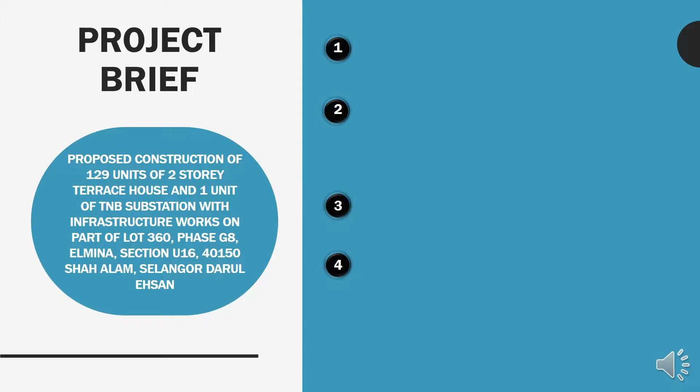The project that we chose is the proposed construction of 129 units of two-story terrace house and 1 unit of TNB substation with infrastructure works at Shah Alam. This project is listed as Platinum Green Building Index. The client of this project is Sime Darby. Meanwhile, the contractor of this project is Sri Mansang Sdn Bhd.

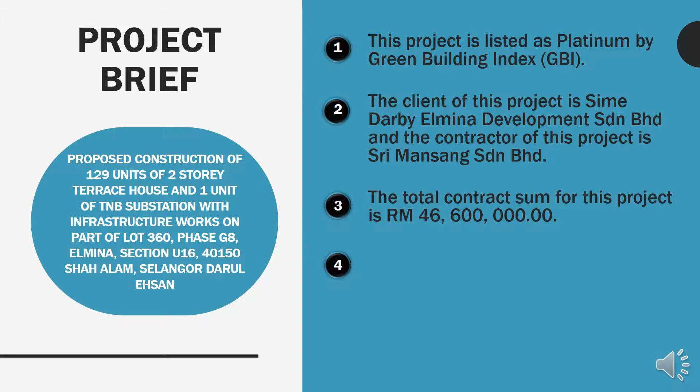The total contract sum for this project is 46.6 million. The completion period of this project is 78 weeks and the date of possession of site is 23rd January 2014 and the date of completion of work is 23rd July 2015.

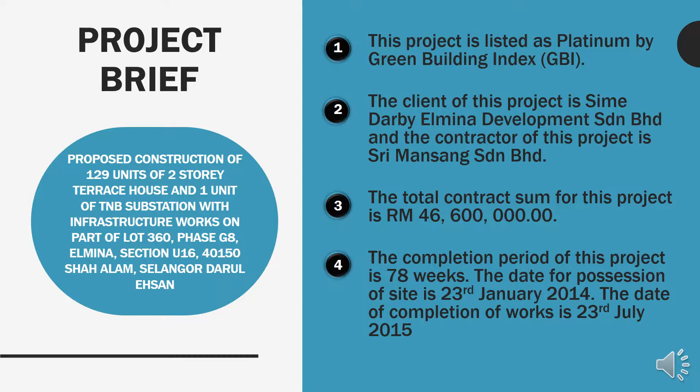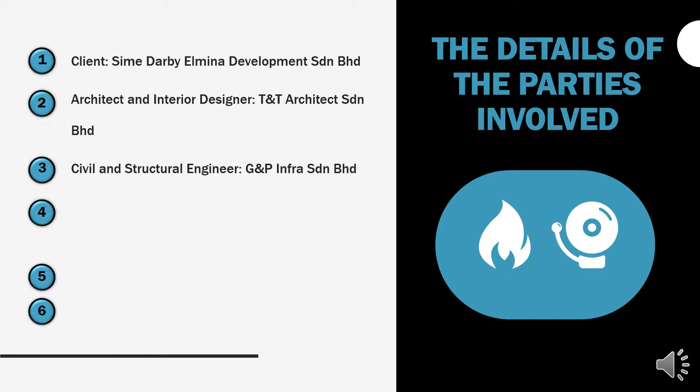The detail of the parties involved: client Sime Darby Elmina Development Sdn Bhd, architect and interior design T&T Architect Sdn Bhd, civil and structural engineering G&P Infra Sdn Bhd, mechanical and electrical engineer Jurutera Perunding Kuasa Tenaga Sdn Bhd, landscape design Mentari Design and quantity surveyor Basar and Harun Sdn Bhd.

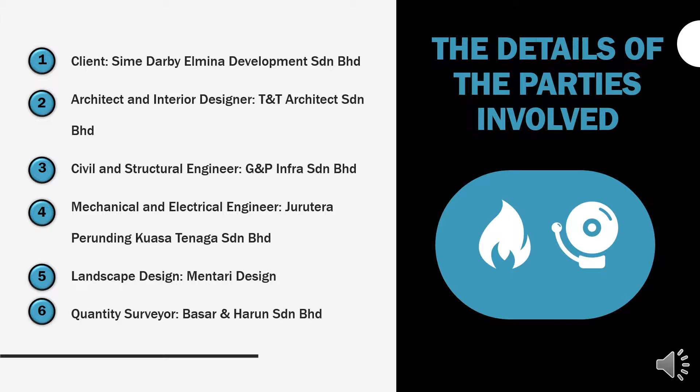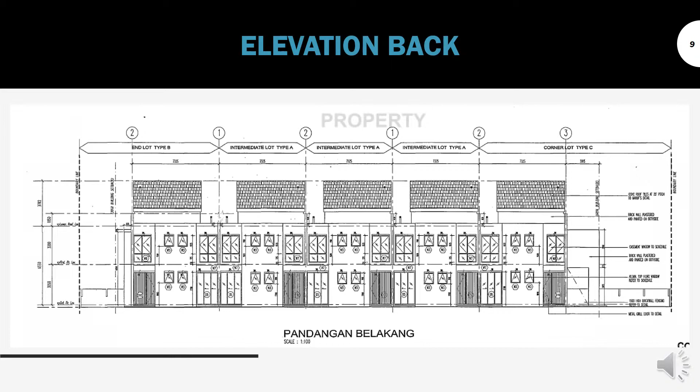The influence of building morphology. This project is rectangle shape, and this shape has been selected to maximize the usage of land and to provide adequate space and, the most significant thing, lighting. This house is divided into three types which are corner lot, intermediate and end lot.

The size of corner lot is 10.14 meters length, the size of intermediate lot is 7.33 meters length and the size of end lot is 11.8 meters length. The story height of the house is 9.73 meters and the total height of the house is 19.46 meters.

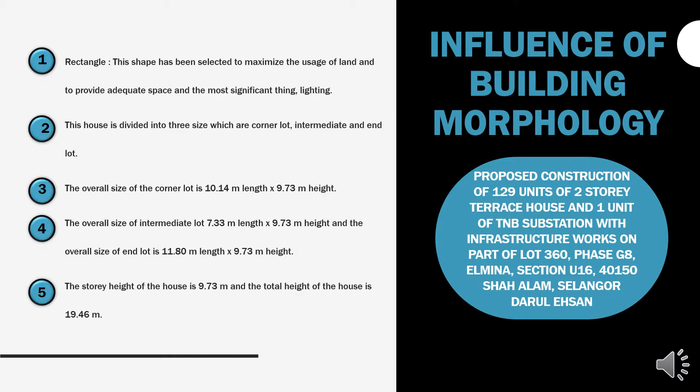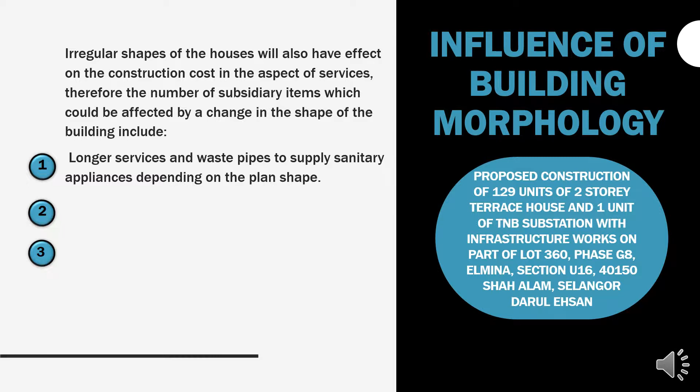Irregularity of the house will also have effect on the construction cost in the aspect of services. Therefore, the number of subsidiary items which could be affected by a change in the shape of the building include longer service and waste pipes to supply sanitary appliances depending on the plan shape, possibility of high roof cost due to increased number of corners which cause material wastage, and possibility of additional costs in applying finishing and decoration.

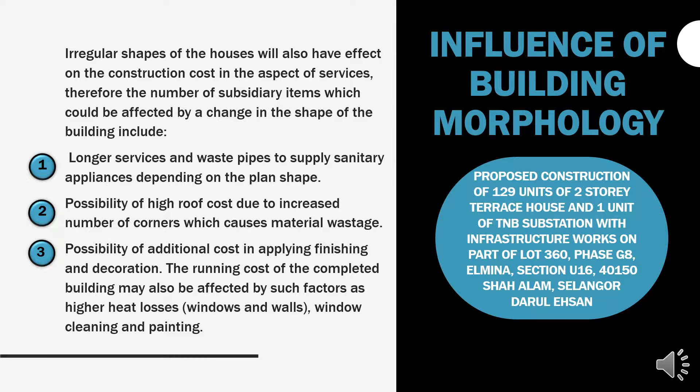The running cost of the completed building may also be affected by such factors as higher heat losses through window and wall, window cleaning and painting. Likewise, for the project that we have studied, the construction costs for the services are not as high as compared to an irregular shape of house.

GFA of corner lot, intermediate and end lot is 98 meters square, 71 meters square and 114 meters square respectively. We have studied a number of other buildings with different shape and height with the same GFA as the intermediate house, which is 98 meters square. We have come to a conclusion.

The total construction cost increases with increase in the perimeter wall length in relation to the floor area. The increased cost becomes well pronounced when the height of the building is increased with additional floors without altering the total floor area. Irregular shape will reduce the usable area, and simple design is more economical than irregular design.

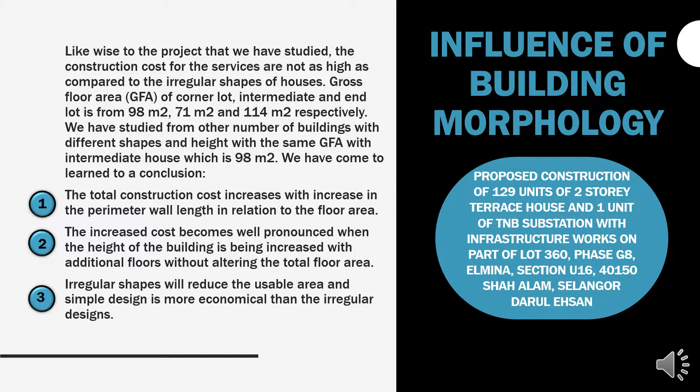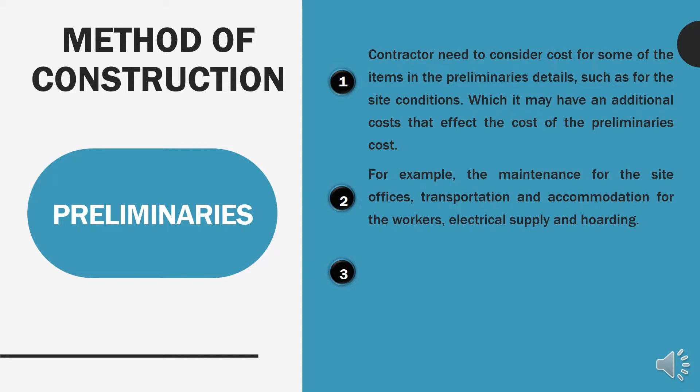Method of construction. Preliminaries. Contractor needs to consider cost for some of the items in preliminary detail, such as the site condition, which may have additional costs that affect the preliminary costs. For example, the maintenance for the site office, transportation and accommodation for the workers, electrical supply and hoarding. For the project that we use in our task, the preliminary cost is 1.8 million ringgit Malaysia.

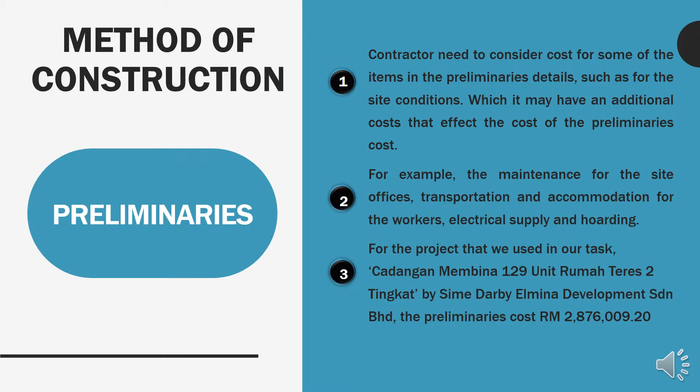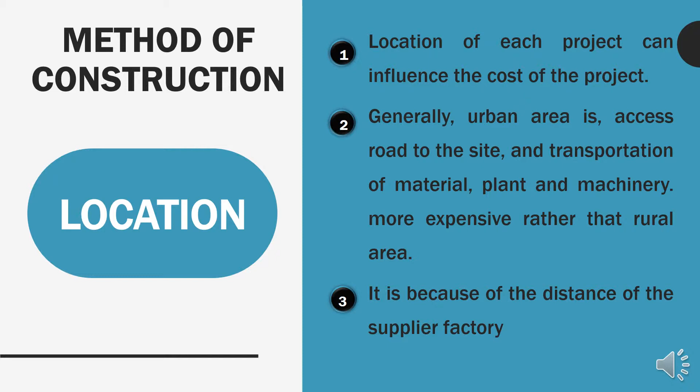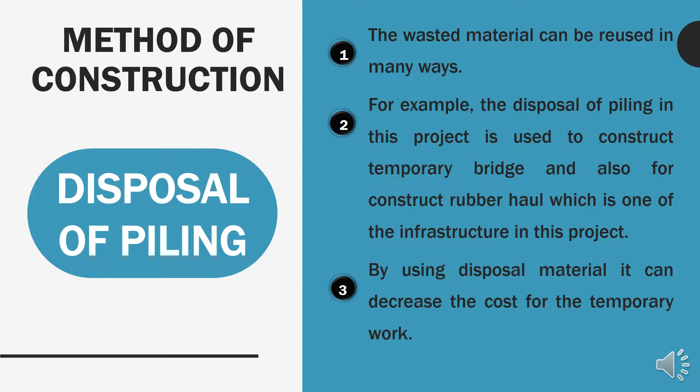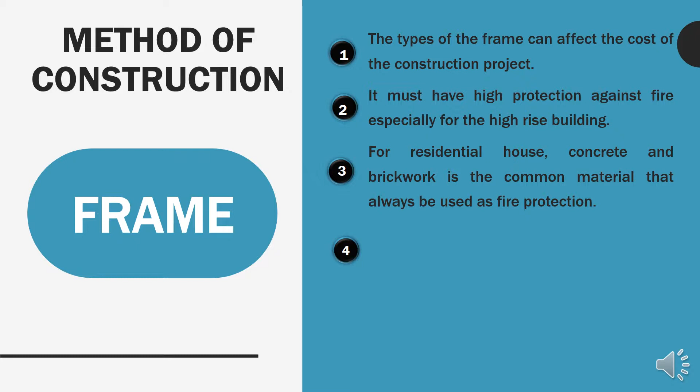Frame. The type of the frame can affect the cost of the construction project. It must have high protection against fire, especially for high-rise buildings. For residential houses, concrete and brickwork are the common materials always used as fire protection. For this project, Elmina used reinforced in situ concrete for the frame and natural sources of aggregate. Most of Elmina's projects use these two types of material.

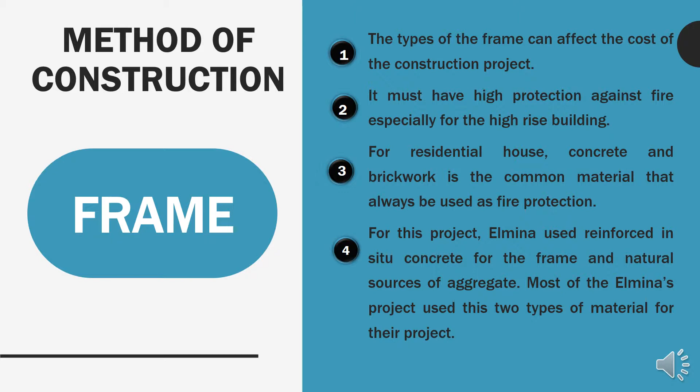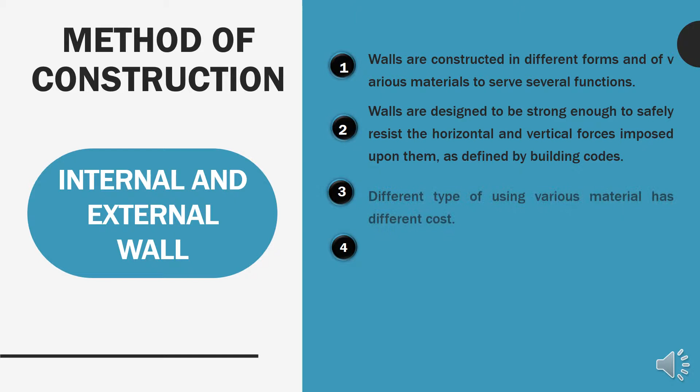Internal and external wall. Walls are constructed in different forms and various materials to serve several functions. Walls are designed to be strong enough to safely resist the horizontal and vertical forces imposed upon them as defined by building codes. Different types using various materials have different costs. For the Elmina project, 220 mm thick cement and sand brick is used for the external wall and 110 mm thick cement and sand for the internal wall.

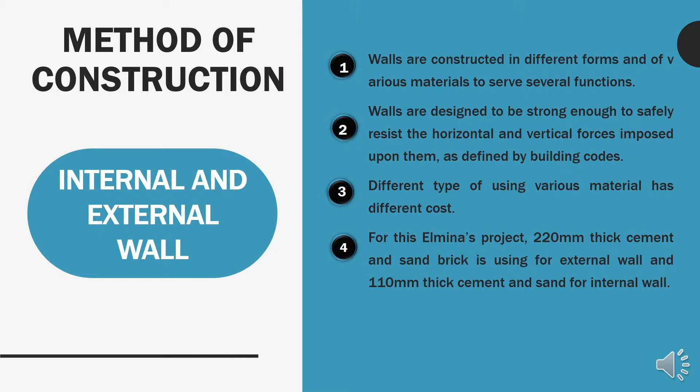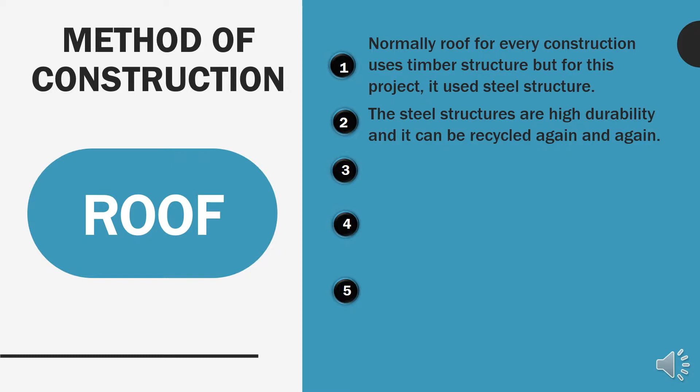Roof. Normally, the roof for every construction uses a timber structure. This project uses a steel structure. Steel structures have high durability and can be recycled again and again. For the roof covering, this project uses Colorbond galvanized iron sheet. They are light in weight, inexpensive, provide insulation for the structure and save energy. So both materials are the best choice for green recycled roofing materials.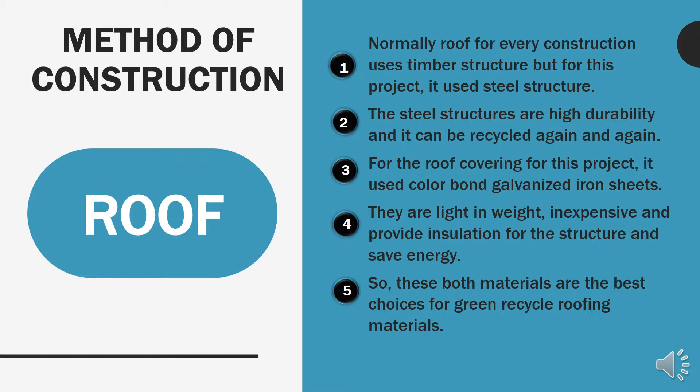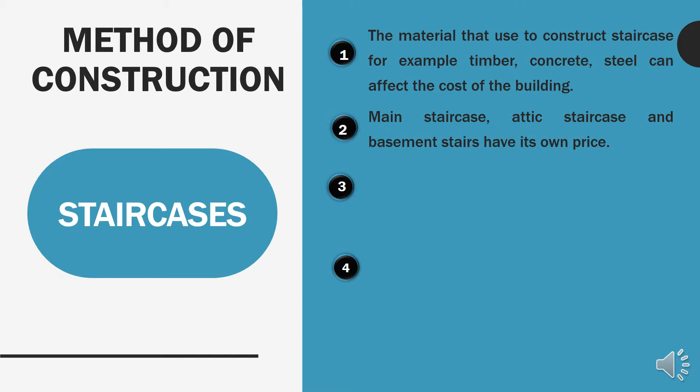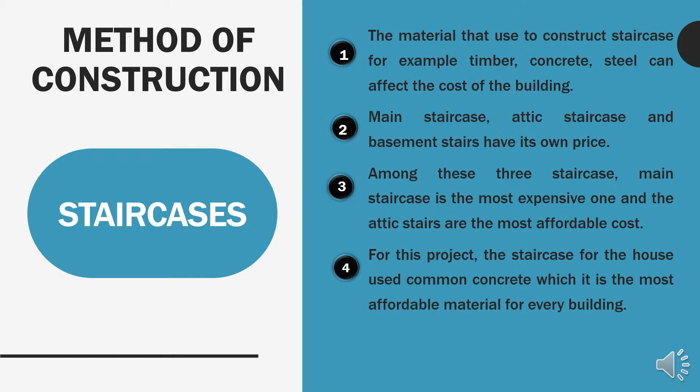Staircase. The material used to construct the staircase, for example timber, concrete, or steel, can affect the cost of the building. Main staircase, attic staircase, and basement stairs each have their own price. Among these three staircases, the main staircase is the most expensive one, and the attic staircase is the most affordable. For this project, the staircase for the house uses common concrete, which is the most affordable material for every building.

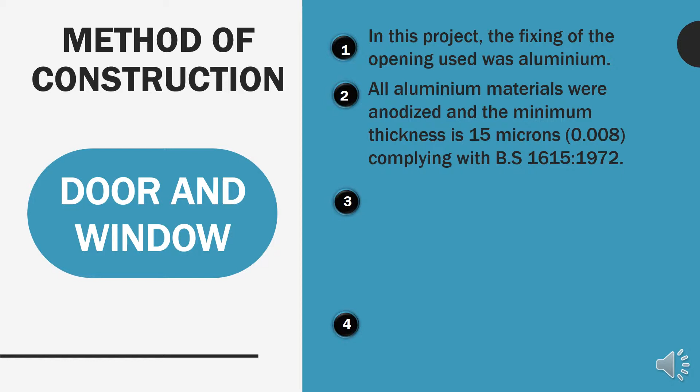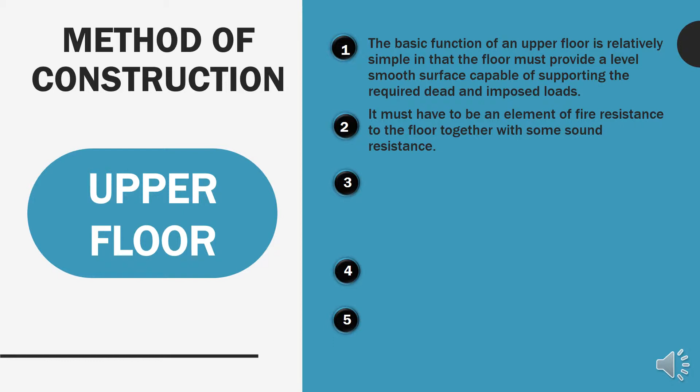Upper floor. The basic function of the upper floor is relatively simple in that the floor must provide a level, smooth surface capable of supporting the required dead and imposed loads. It must be fire resistant together with some sound resistance. The concrete floor slab construction process includes erection of formwork, placement of reinforcement, pouring, compacting, and finishing concrete, and lastly, removal of formwork and curing of the concrete slab.

For this project, it used from 115 mm to 275 mm thick slab, and they use reinforced in situ concrete. Concrete is from natural sources, which are sand and aggregate.

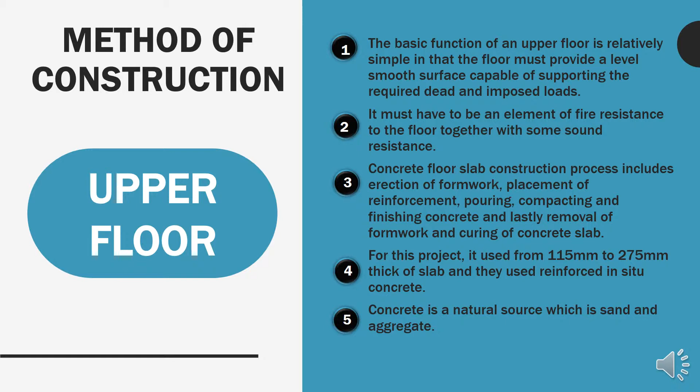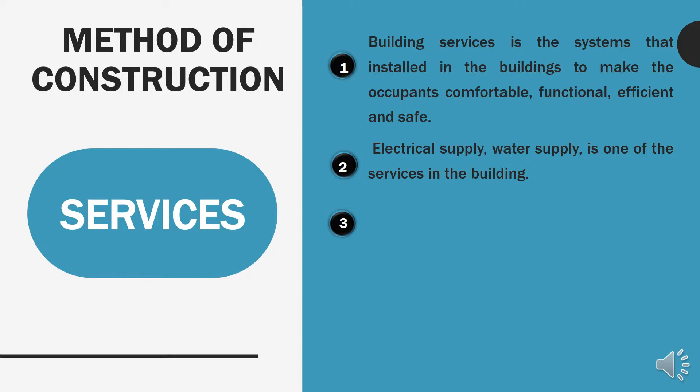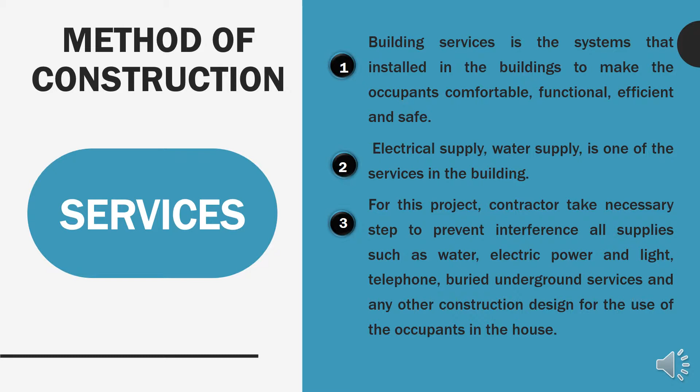Service. Building services are the systems installed in the building to make the occupants comfortable, functional, efficient, and safe. Electrical supply and water supply are among the services in the building. For this project, the contractor takes necessary steps to prevent interference of supplies such as water, electric power and light, telephone, buried underground services, and any other construction designed for the use of occupants in the house.

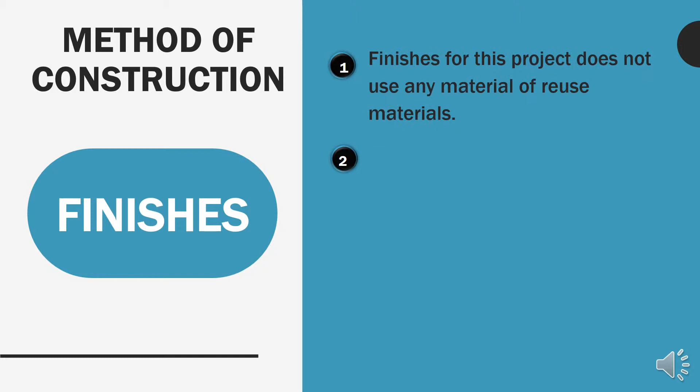Finishes. Finishes for this project do not use any reused material. Generally, finishes for every project, including this project, use ICI Dulux Weathershield acrylic wall finish for external, meanwhile, internal uses ICI Maxilite Plus emulsion.

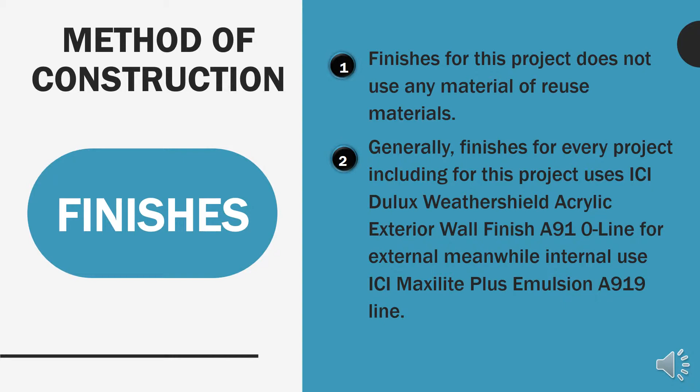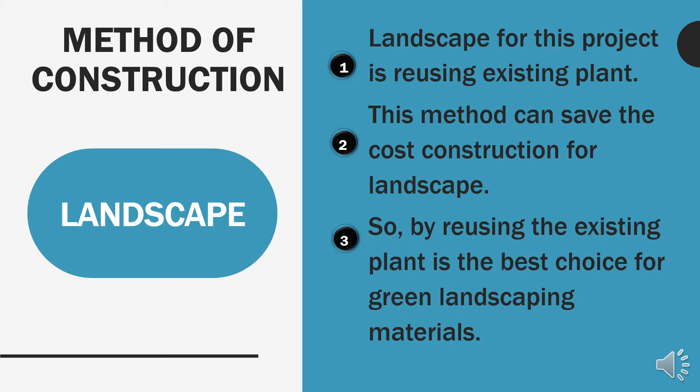Last, for the method of construction, which is landscape. Landscape for this project is reusing existing plants. This method can save the construction cost for landscape. So, reusing the existing plants is the best choice for green landscaping materials.

Green features of the building. A green building is a building whose design, construction, or operation reduces or eliminates negative impacts and can create positive impacts on our climate and natural environment. Green building preserves natural resources and improves our quality of life.

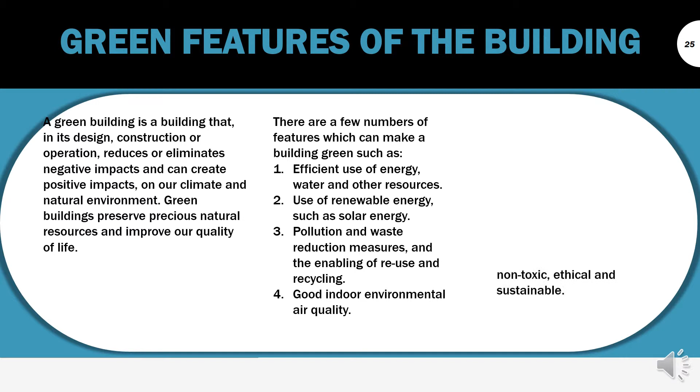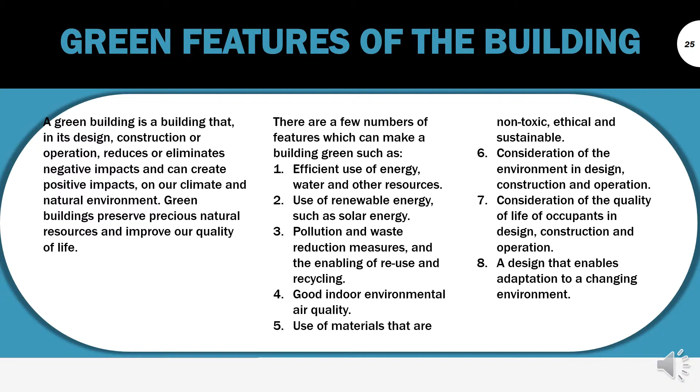There are a number of features which can make a building green, such as efficient use of energy, water, and other resources, use of renewable energy such as solar energy, pollution and waste reduction measures, and the enabling of reuse and recycling, good indoor environmental air quality, use of materials that are non-toxic, ethical, and sustainable, consideration of the environment in design, construction, and operation, consideration of the quality of life of occupants in design, construction, and operation, and a design that enables adaptation to a changing environment.

The landscape for this project is using existing plants to prevent the wastage of plants by using the existing source at the site. The surroundings of the houses are equipped with trees which allow the residents to be healthier. At the same time, it improves outdoor air quality.

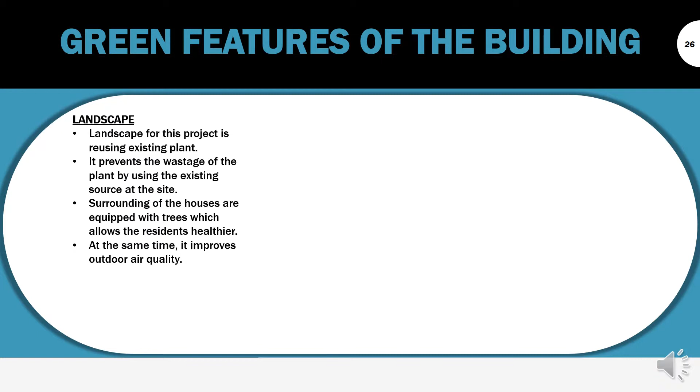Window, the fixings of the openings use aluminum. All aluminum material was anodized. The color was natural anodized, which increases resistance to corrosion and provides better adhesion for paint, primer, and glue than bare metal. It can be recycled. The house allows good openings to receive lighting from the sun. It increases the lighting inside the house. It gives indoor air quality and good ventilation inside the house.

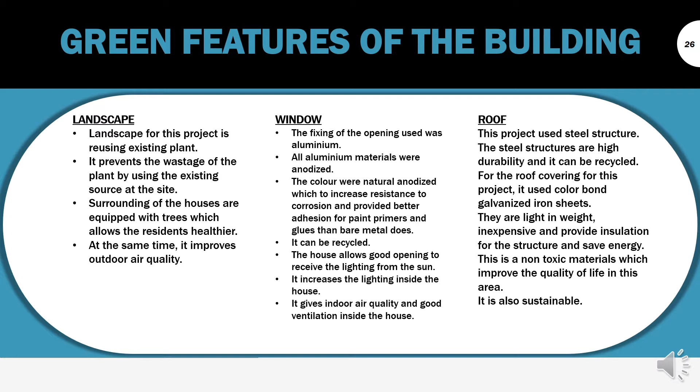For roof, this project uses steel structure. The steel structure has high durability and it can be recycled. For the roof covering, this project used Colorbond galvanized iron sheet. They are light in weight, inexpensive, and provide insulation for the structure and save energy. This is a non-toxic material which improves the quality of life in this area. It is also sustainable.

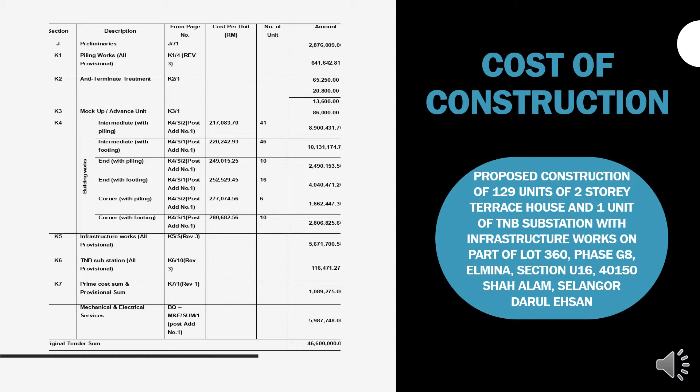This is the cost of construction. The final cost of construction is 46.6 million Malaysian ringgit.

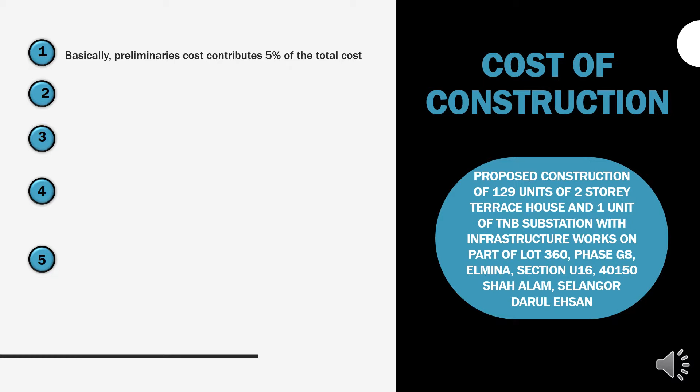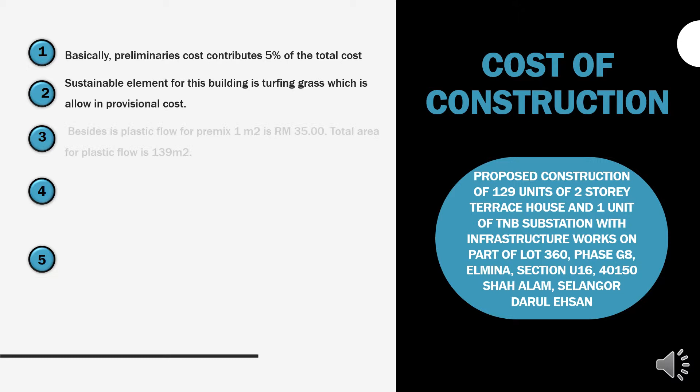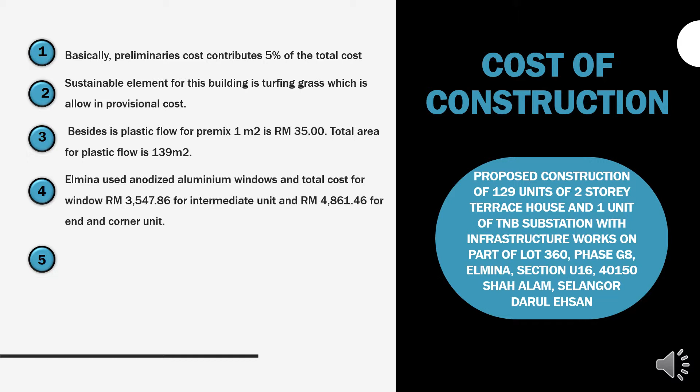Basically, preliminaries costs contribute 5% of the total cost. The sustainable element for this building is the turfing grass, which is allowed in provisional cost. Besides, there is plastic flow; per 1 meter square it is 35 ringgit Malaysia. So the total area for plastic flow is 139 meter square. Elmina uses anodized aluminum windows, and the total cost for windows is 3547 ringgit Malaysia for intermediate.

Meanwhile, 4861 ringgit Malaysia for end and corner. Elmina also uses an excess of piling for a bridge, which acts as temporary access to the site from the public road, and it costs 25,000 ringgit Malaysia.

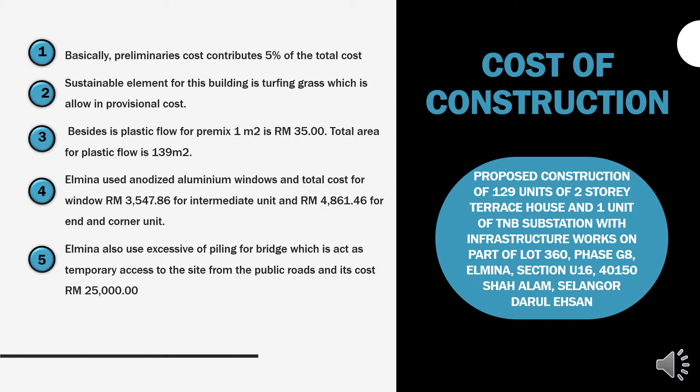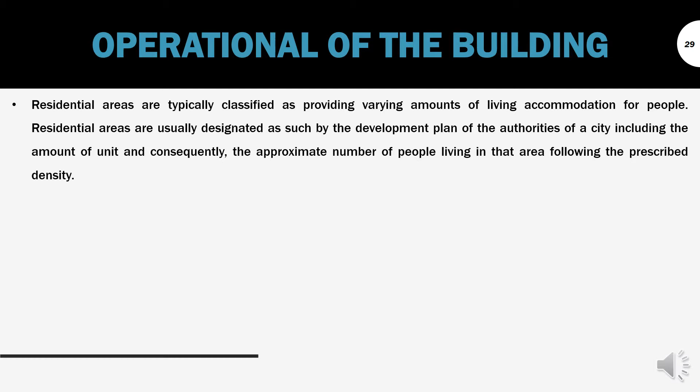Operational of the building. Residential areas are typically classified as providing varying amounts of living accommodation for people. Residential areas are usually designated as such by the development plan of the authority of a city, including the amount of units. Consequently, the approximate number of living in that area follows the prescribed density. A residential building is one that is designed and accordingly built for inhabitants to live in and is called a house. Inhabitants can either be a family, single, a couple, roommates, and even a group.

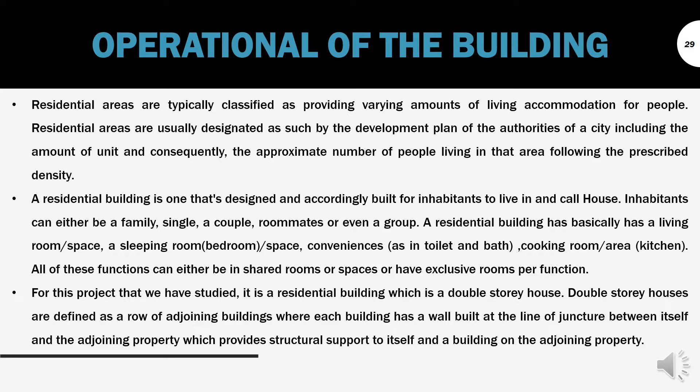A residential building basically has a living room or space, a sleeping room or space, conveniences, which is toilet and bath, and a cooking room or kitchen. All these functions can either be in a shared room or space or have an exclusive room per function. For this project that we are studying, it's a residential building which is a double-story house. Double-story houses are defined as a row of adjoining buildings where each building has a wall built at the line of juncture between itself and the adjoining property, which provides structural support to itself and a building on the adjoining property.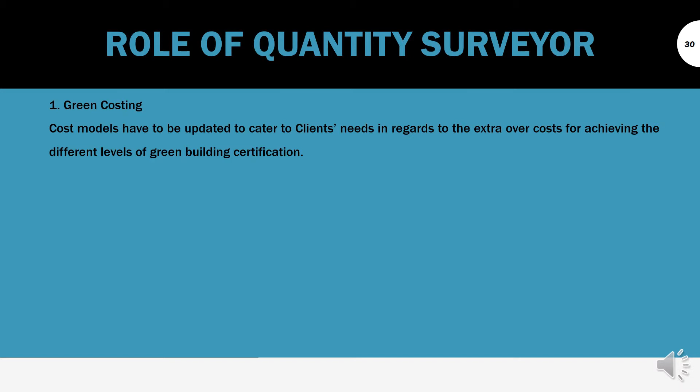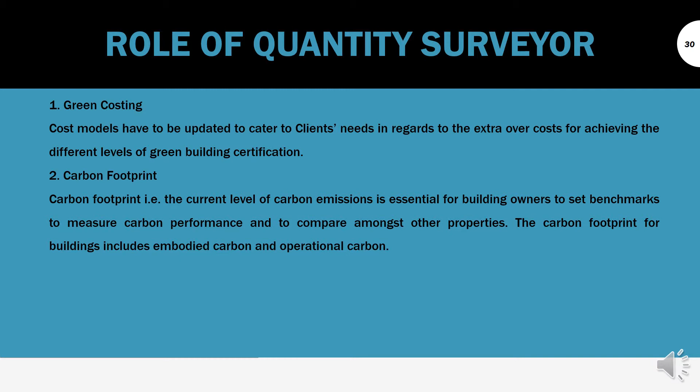The role of the quantity surveyor. First, green costing. The cost model has to be updated to cater to the client's need in regard to the extra over costs for achieving the different levels of green building certification. Second, carbon footprint. The current level of carbon emission is essential for building owners to set a benchmark to measure carbon performance and to compare amongst other properties. The carbon footprint for a building includes embodied carbon and operational carbon.

Third, life cycle costing or life cycle assessment. LCC will grow in importance in the next few years, and the QS, who is an expert in cost management, is in an excellent position to gear itself for this role. LCC can be used to assist the management in the decision-making process to go green.

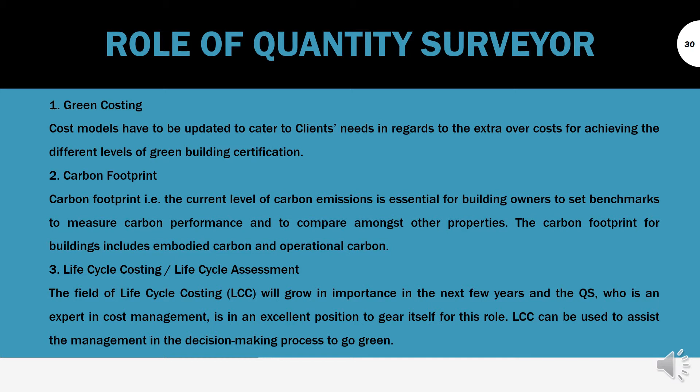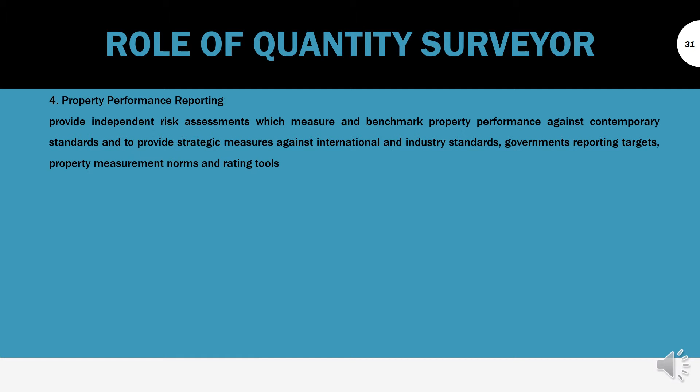Fourth, property performance reporting. Provide independent risk assessment which measures and benchmarks property performance against contemporary standards and provides strategic measures against international and industry standards, government reporting targets, property measurement norms and rating tools.

Fifth, green building rating assessment. Courses such as the LEED accredited professional certification have been created to enhance the understanding of the relevant green building rating system and environmentally sustainable design. With a greater understanding of the green building rating system, the QS will be in a better position to advise the client both on the costing and sustainable design.

Building information model. With the advancement in building information modeling, which is the BIM system, the use of object-oriented CAD may be able to contain information such as green assessment points, intelligent advice on usage, LCA with carbon specification, and real-time costing as well.

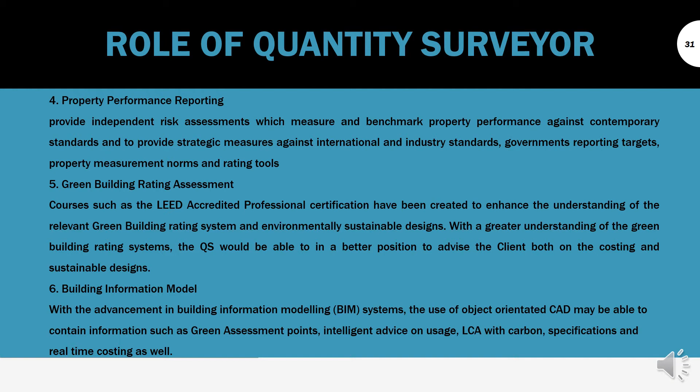The conclusion is sustainable construction is about more than the fabric of the built environment. The effect of the design variables and the method of construction of this green building index probably influence the cost of the building itself. With the exposure of green building or sustainable building in the construction industry today, players in the construction industry will be aware of the benefits given by green or sustainable buildings. The next generation can still experience the nature of today if we properly care about nature.

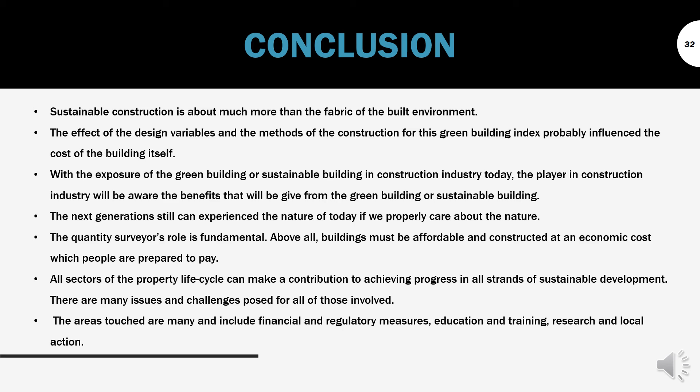The quantity surveyor's role is fundamental. Above all, buildings must be affordable and constructed at an economic cost which people are prepared to pay. All sectors of the property life cycle can make a contribution to achieving progress in all strands of sustainable development. There are many issues and challenges posed for all of those involved. The areas touched are many and include financial and regulatory measures, education and training, research and local action.